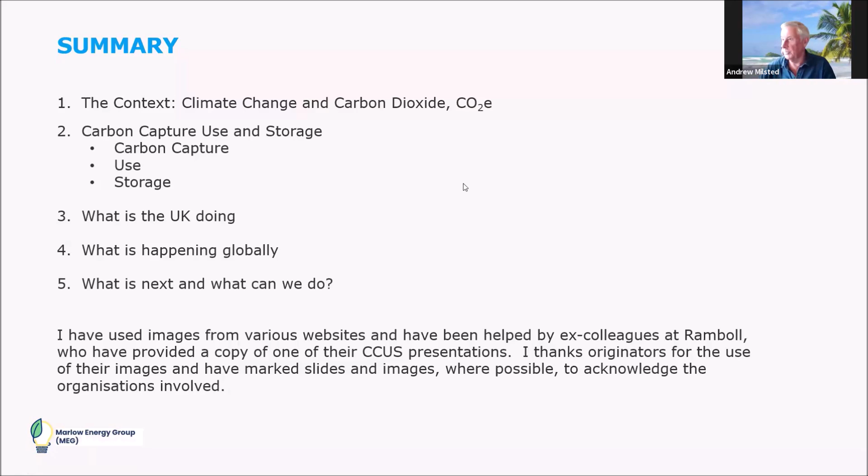First, we'll do a bit about the context. We'll go into carbon capture, and then the use bit of it and the storage bit of it. And then we'll have a quick look at where the UK has got to in terms of doing this, and then a little bit of a look at what we think is happening globally. And then finish up with what has to come next, and is there something that we can do to help the situation? So let's move on.

Climate change: I think most of the people on this call probably understand climate change. We call it CO2 trapped in the atmosphere, causing temperature rise. It's also referred to as greenhouse gases, which is a mixture of gases usually represented as CO2 equivalent. It's called the greenhouse effect. Global warming is one of the terms used to describe this; I prefer climate change myself. And as we came into the 2020s, the global emissions of carbon dioxide had reached 59 billion tons of CO2 per year and beyond. We'll look at those figures again because, depending where you look on the internet, on various reports, you get slightly different figures defined in slightly different ways.

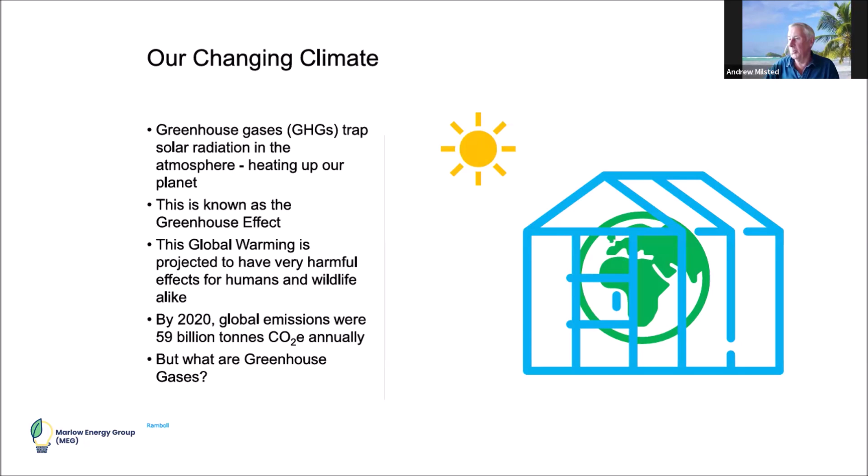In terms of greenhouse gases, a large portion of man-made greenhouse gases are coming in the form of carbon dioxide, as we talked about, usually from burning fossil fuels. But there's also quite a high effect from methane produced by cows, but also by rotting vegetables and various other things. And actually, from oil reserves, there's some leakage of methane from natural gas systems. So there's quite a lot of methane; in terms of tons it's not much, but it has a big effect in terms of carbon dioxide equivalent.

Nitrous oxide is formed whenever you burn any fuel because you're basically using air, which has a lot of nitrogen in it, and therefore it forms nitrous oxides of various kinds. And nitrous oxide, N2O, does have a significant climate change effect, greenhouse gas effect.

And then there are the fluorine gases, the refrigerants. Various forms of refrigerant are out there. We've tried to move on from some which had a major effect on climate change, but some of those are still being emitted. And really small amounts of this kind of material do make a big difference to the load of greenhouse gases in the environment. So that's still a work in progress.

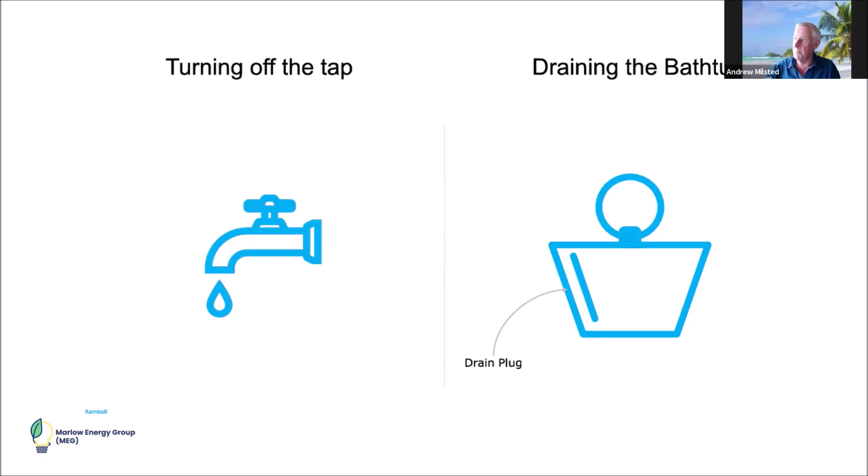Let's just pause a second because I came across some interesting information on the internet, which is the kind of information that some of the climate deniers are using. So I thought it was worth, for our purposes, to understand where their arguments seem to be coming from. Whether we call it misinformation or not, I'm not sure.

But basically, they look at the natural emissions of CO2 from forests, from volcanoes, from natural systems, from the sea. CO2 is going up all the time from rotting vegetation and so on, from animals, from us breathing. So there's about 10 times. It's in the order of 450 billion tons of CO2 a year. Now, balance that against something in the order of 50 billion tons of man-made CO2. And their argument seems to be, why worry about the anthropogenic, man-made CO2, because it's dwarfed by the natural emissions.

But what is happening naturally, particularly over the last 10,000 years and periods of stable climate, is that the natural emissions are roughly balanced by the absorption of CO2 by the natural environment, by growing trees, by seas, and so on. So there is a balance in place.

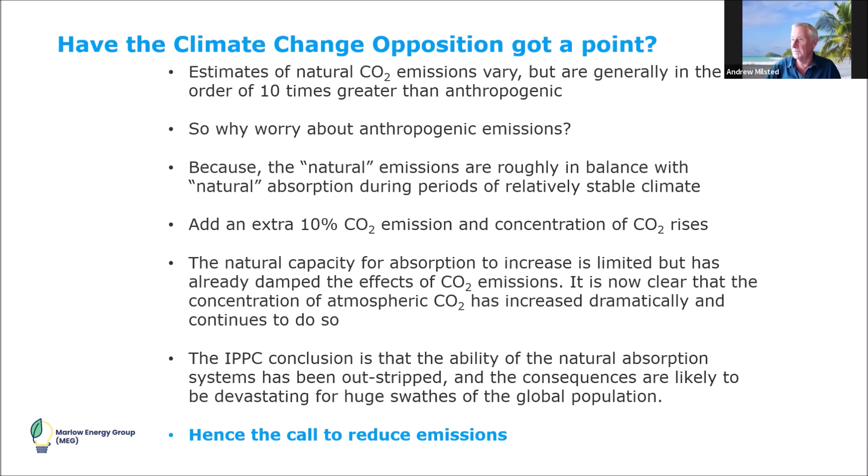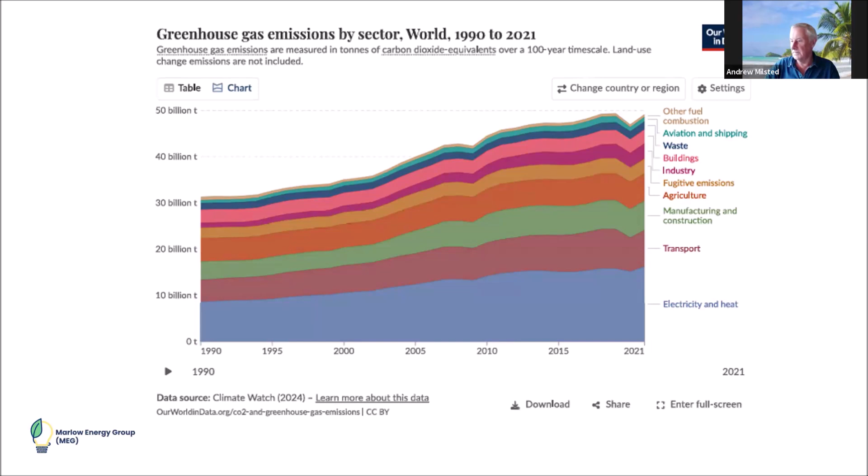So that takes us up. There was a dip you can see around the time of COVID across the world. So everything sort of turned down a little bit. We can see that dip in the data, but it's gone up to 50 billion and over since then. So that's from Climate Watch, figures released in 2024.

What happens with projected greenhouse gas emissions in terms of future warming? Well, with current policies, which have been announced globally after the various COP meetings, we're probably on course to continue to increase temperature to 2.5 to 2.9 degrees C. There's a broad range there because it's not clear exactly how effective some of those policies will be.

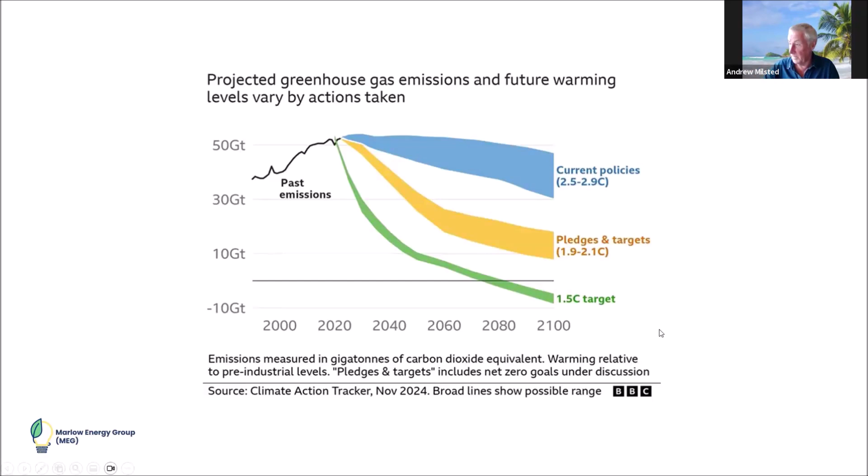Carbon capture, this is the second part then, to talk about carbon capture, use or storage, depends how you want to say it. It's a means of preventing or removing CO2 from man-made emissions and storing it away so that it doesn't re-enter the atmosphere.

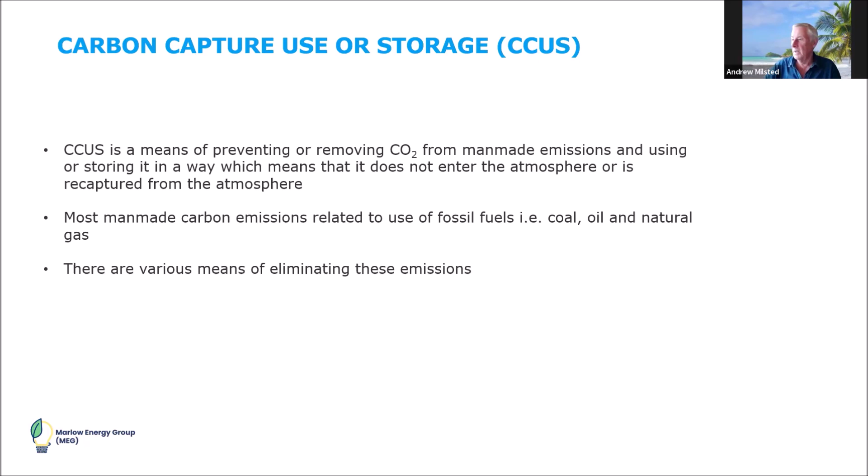Most of these man-made emissions are generated by the use and burning of fossil fuels, coal, oil, and natural gas, but there are other emissions related to chemicals manufacture and so on, cement manufacture. Cement is one of the big contributors, in fact. And when we look at this, there are various means of trying to eliminate or prevent those emissions.

The key drivers we see, in terms of the actual carbon capture mechanisms, relate to the capture rates, the availability, how reliable the equipment is in operation, whether it's technically or commercially proven, its health and safety. But all of these things really depend on some financial benefit being in place for people to build these plants. They cost money to build, they cost money to run. So unless there's some financial benefit in doing so, they will not get built and will not be operated.

Carbon capture processes, there are a lot of them. We'll look at that, but I'm not going to look at all of them in detail, but they tend to be defined in four basic categories: post-combustion, pre-combustion, oxy-fuel, and industrial processes. So all of these things produce more or less carbon dioxide. But by far the biggest emission of CO2 is post-combustion, and by far the biggest application of carbon capture is in the post-combustion process.

I have to say, when I'm talking about this, industrial processes, depending on how you look at that, there are many industrial processes which have been in operation for some time, which separate carbon dioxide from other materials. Most notably, let's take the example of natural gas. Natural gas quite often comes out of the ground with a high proportion of carbon dioxide in it.

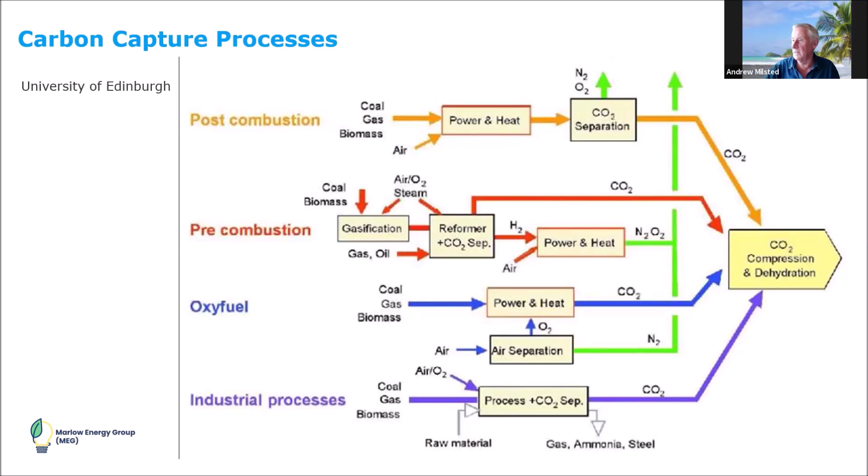So, as I said, there are any number of processes which have been looked at, researched in universities. There are many chemical ways of taking carbon dioxide out of a gas in a gaseous state. There are some biological processes, enzymatic processes, which could become significant in the future, but haven't yet got to the stage of development where they are being commercially applied. A lot of this comes down to the cost of running these processes.

There are plastic membrane processes and cryogenic processes which do separate carbon dioxide, and membrane processes are used for conditioning natural gas, as I was describing before. You can put them through a membrane process which lets the methane pass and keeps the CO2 out, and it gets vented. Chilled ammonia, they've been playing around with that for a long time without it really getting much traction.

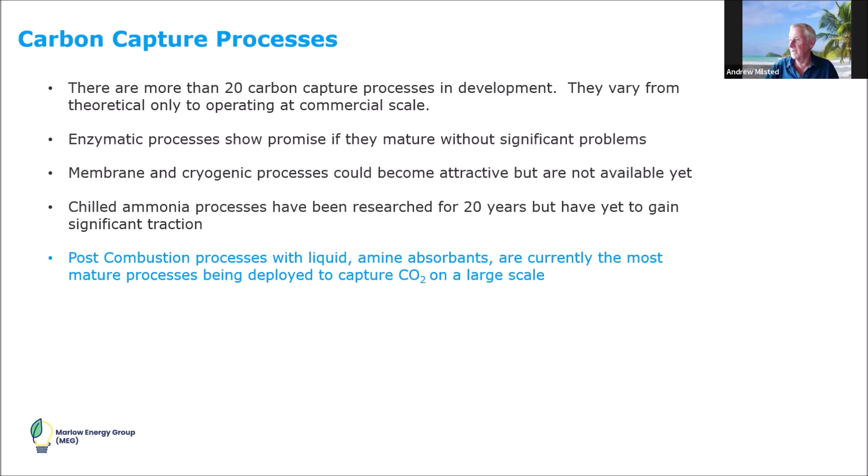So we're going to look at post-combustion, and in post-combustion, the majority of processes we see at the moment are using a chemical called amine, which absorbs CO2 at room temperature. If you heat it up to 50, 100 degrees, something like that, it will then let that CO2 go. So you can use that reversible reaction to take CO2 out of flue gas from an engine or a power station and direct the CO2 to some storage.

So let's just have a look at that. I don't expect you all to suddenly become clever engineers, but it basically consists of two large columns with various pumps and heaters around them. You can see on the bottom left of that column there's a flue gas inlet, so you can pump flue gas through a column of amine trickling down. The liquid at the end is amine with CO2 in it.

Clean flue gas, the rest of the flue gas, the nitrogen oxides and so on, will pass out of the top of the column and go back into the air. The amine with the CO2 in it goes into what they call a stripper column, where it's heated, and that drives off the carbon dioxide, which can then be compressed and liquefied to be used elsewhere or to go to storage. So this process doesn't determine whether it's used or stored, but it does require some heat to be applied.

And actually, there's a fair amount of steam energy that has to go into this process to make it work. Electricity to run the pumps and the compressors at the end. So there's a fair amount of energy as well as cost of the equipment that has to go into this to make it happen. There are health and safety challenges with this system. Amine is something you don't want to wash in, it needs to be handled carefully. It is the most mature carbon capture technology, but it does require these inputs of energy to make it work.

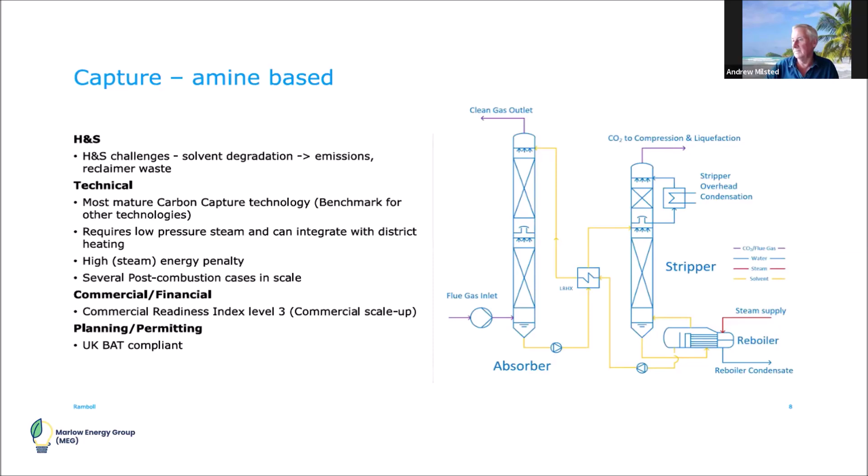There are several post-combustion cases operating at scale, and as I said earlier, it's a process which has been used in industry for separating carbon dioxide for a long time now. And commercially, everybody knows basically how much it costs to build and run, and so there's some confidence in building this thing and it doing its job. It's also best available technology compliant. That's a term in UK and European legislation that means that it's accepted as being reasonable practice.

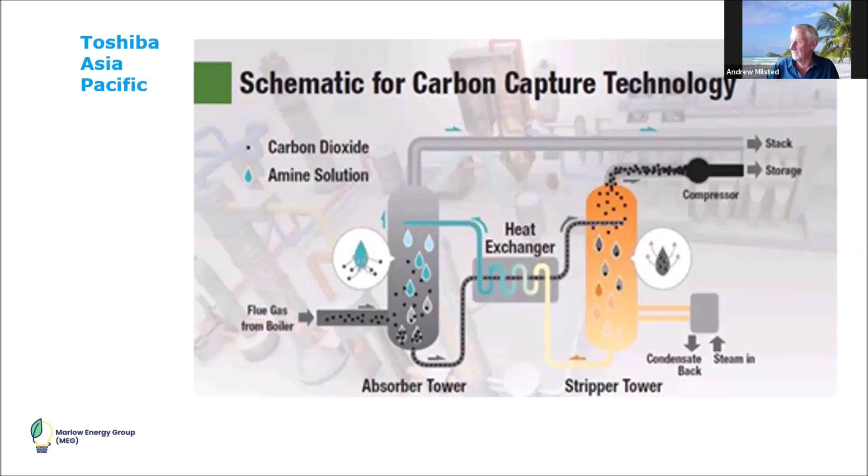That's just a slightly more colourful chart of the same thing, but maybe it helps some people to understand that the little molecules of CO2 get into the amine, and then when it's heated up, they are driven off in a concentrated stream to storage. This one, care of Toshiba, Asia Pacific. Toshiba were also the people who built that demonstration plant we saw on the introductory slide.

Some of the downsides, let's just briefly touch on that. It's a tailored process. Most of the amine solutions are chemically enhanced, let's say. They have additives which improve their performance in various ways and stop them being contaminated by minor constituents of flue gas. They tend to be pretty expensive, so you want to keep hold of those as much as possible. They can capture high percentages of the carbon dioxide in the flue gas. Some claim up to 99.5%, I think I've seen. But a safe level is in the 95% region you can get.

They're usually proprietary. Every process design company worth its salt seems to have its own amine process. They design the facility itself, they give the guarantees, and they will supply the actual amine. So Toshiba, Shell, various others have processes which can be used by designers to make this happen.

The flue gas itself, depending where it comes from, could be very clean, but if, for instance, at worst case, you're putting it on the back of a coal-fired power station, you may have to make sure that you've removed the dust, sulfides, which are formed from coal, usually chlorides maybe as well. All those things will contaminate and cause problems in the amine process. So you have to put in filters, if you like, to remove those prior to the carbon dioxide absorption process.

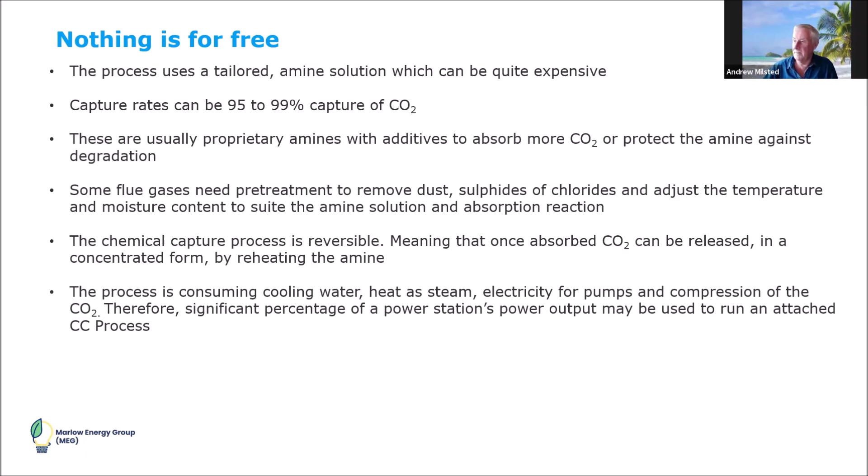So it's consuming heat, it's consuming cooling water, there's electricity. We mentioned all of these things for compression. It can take quite significant percentages. If you fit it on the back of a power station, you're probably losing something more than 10% of the power that that station can generate, because you're taking energy from the power station to provide the energy and heat that this process requires.

You still do lose amine, and it has to be replaced. So it would be a waste that they have to get rid of, and it does need to be replaced to keep that process running. So there is some turnover of the amine, which is quite expensive.

And to fit it on the back end of an existing power station or other process is not as efficient as designing a new power station, which is integrally designed with the carbon capture for a lot of reasons, which I won't go into, but you can optimize the two processes together to make sure you get the least amount of loss of energy, if you like.

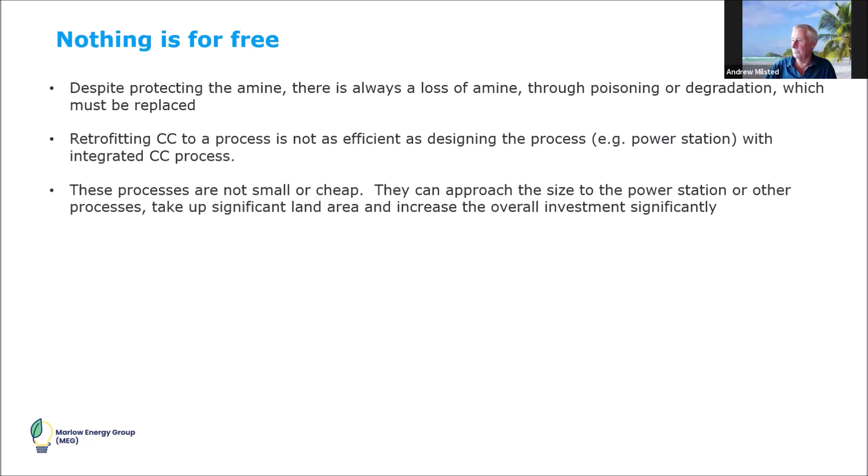And they're not small or cheap. These things do cost significant, tens of millions of pounds to build. They can be quite significant add-on portions to a power station or chemical process. Just to give you an idea of size, this is from How Stuff Works, the website. I found a picture of one of the few full-scale carbon capture processes.

The bit over here is, I believe, the carbon capture process. And if you look at the cars and vehicles around the bottom, it's a big lump of metal. This inset picture has the power station. These are the power station itself with the 4 chimneys. And on the side there is the carbon capture unit. So you can imagine this thing is costing tens of millions of pounds.

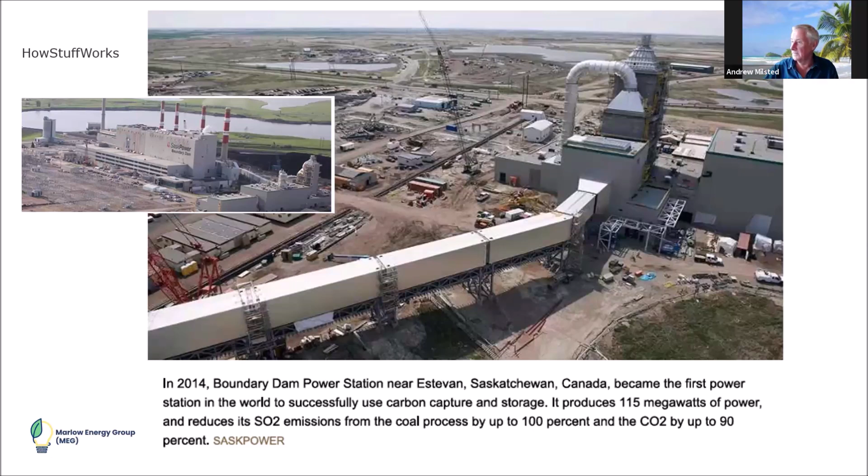This one's actually in Saskatchewan in Canada and has been in operation since 2014, I understand. So it works. It captures up to 90%, and that is then stored underground in Canada. So it is operating at size in some places.

Now we move on to what happens after you've captured the carbon. Now the first step should be to try and reuse it. So it can be used. It can be used to assist in oil field recovery. It's pumped into the oil reserves to help push out the last barrels of oil. So you can make efficient use of the well you've drilled.

CO2 is quite important for crops and plants. Talking to growers up in north of London a few years ago, they were using CO2 to help grow their salad, peppers and tomatoes in glass houses up there. Cucumbers, they were adding 10% to the productivity of the glass house by putting several hundred ppm of CO2 into the glass house. So it does work.

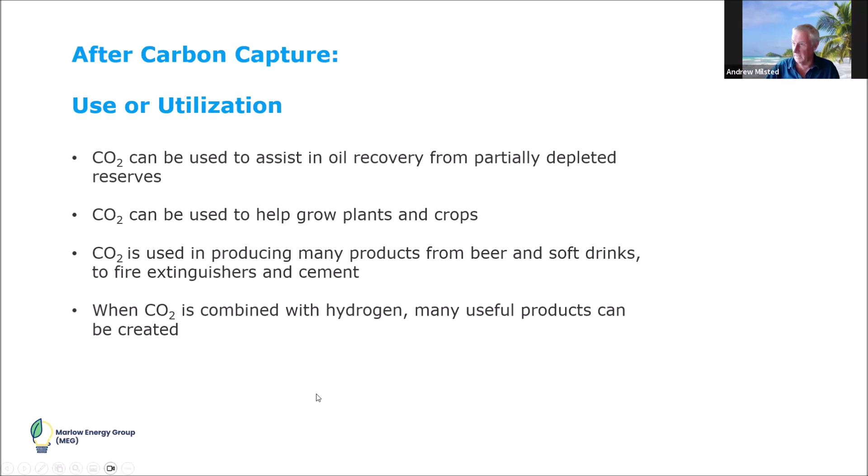It's used in many products, as you all know, from beer to soft drinks, fire extinguishers, and also cement. Cement's potentially a big user of CO2. But what's being pushed by a lot of the petrochemical companies these days is using the CO2 to actually combine with hydrogen in order to make useful products. So I think the next slide basically is a picture of that.

So the idea being that you capture the carbon dioxide at source, you condition it, you use some renewable energy, which can come from panels, wind power, whatever, and that gives you some hydrogen. You could split water to get hydrogen, and by using the hydrogen with the carbon dioxide, you can then make a wide range of products with different catalysts, different processes.

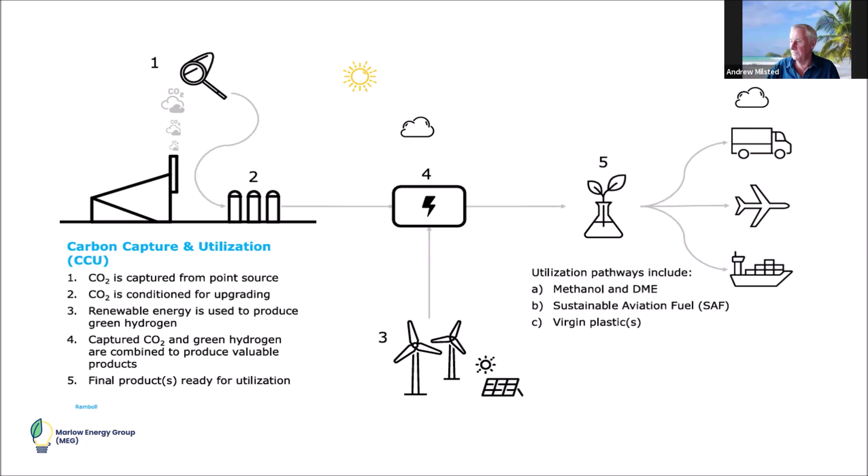You can make things like methanol, dimethyl ether, industrial chemicals, if you like. You can make aviation fuel. You can make plastics. There are a wide range of products that can be made. How much it costs to make those is not quite as obvious in the marketing blurb at the moment. And that would be the determining factor on whether it's used for those kind of processes.

So if you can't use the CO2, then it'll go to storage. And basically, storage is at the moment seen as placing it in the ground in geological structures underground, quite a long way down. And at the moment, I'm jumping ahead a bit, but in the UK, we're looking at using some of the used oil and gas reserves in the North Sea to introduce the CO2.

One of the important things I want to point out in the slide is the ship in the middle. You can do the carbon capture. That's proven and good. There's been a lot of research into pushing gases and things down into geological structures. That isn't such a big problem. I don't want to belittle it, but without some means of transport, of getting that compressed CO2 to the well, this whole system isn't going to work. We're not going to take CO2 out of the air.

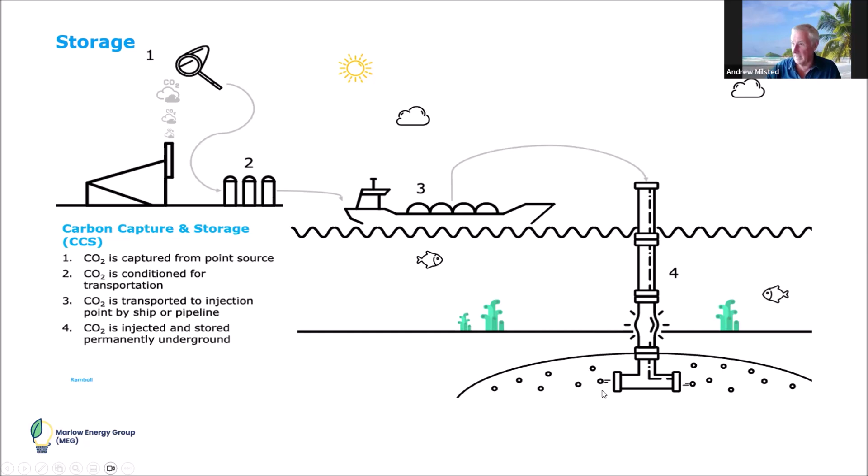So storage, as I said, it can be used. Depleted oil and gas fields can be used. There's a lot of talk about using saline aquifers, preferentially, I think, confined aquifers. It can be dissolved in unconfined saline aquifers, but I think the first choice is likely to be, in the UK, depleted fields or confined saline aquifers.

It's worth saying that you would need a geologist to explain to you the details of this. I'm not a geologist, but my understanding is that if you put it in the right field, the carbon dioxide will actually mineralize, will react with the rock and solidify as carbonates, which will lock it away for millions of years.

I don't think it's intended that the gas would stay as a gas in those deposits. But having said that, natural gas has been locked away for millions of years before the oil industry came and drilled holes into those structures to release it. So, even if it was a gas, as long as it's put in the right way, in the right place, it should stay there for geological periods of time.

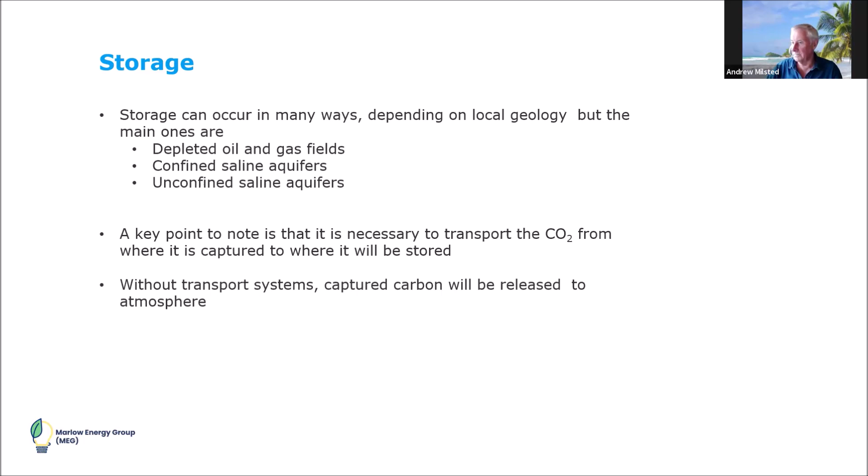I made the point about transport of CO2. That's not a given. That still needs to happen, and it will cost quite a lot of money to set that up and to keep it running. And without that transport system, we won't finally remove this carbon from its emission sources. So there are challenges in carbon capture, a lot of immature technologies. It costs money to build and operate.

At the moment, the regulatory framework across the world is forming rather than mature. Inexistent, that's a Danglish word meaning non-existent. So at the moment, there aren't transport systems available for the CO2, so that needs to be developed.

And the other major criticism of it is that it allows the fossil fuel industry to soldier on whilst trying to pretend that it's clearing up some of the problems related to it. So there's a political issue here. So what's happening in the UK? What are we doing here?

You'll be pleased to know that as of 2013, the UK implemented European directives which require any combustion plant over 300 megawatts of electrical generating capacity to undertake a study to determine how it would fit a carbon capture unit on the back end if that became necessary. So it's supposed to look at reserving a plot of land next to the power station that's big enough to put it on, and also to nominally look at how that gas would be transported to a final place of storage. I have to say that the transport element of that is very basic.

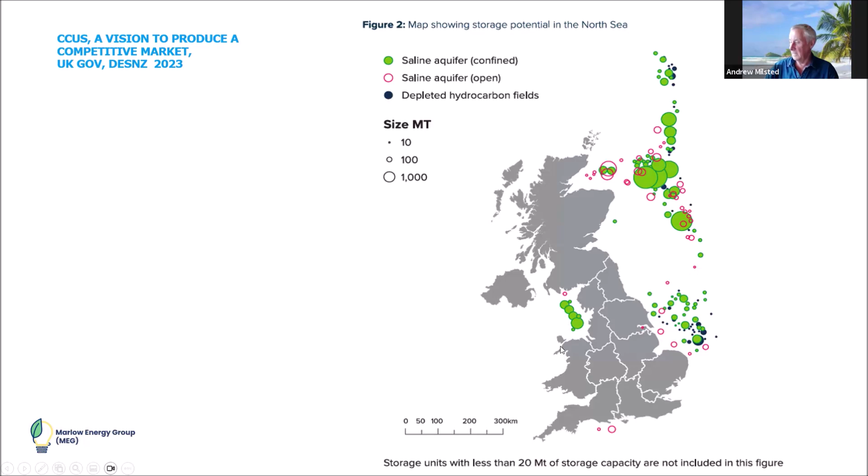And the size of the dot or circle gives you an idea of metric tons of CO2 that can be absorbed. I think it's worth noting there's a lot off the east coast here. There's a lot, as you'd expect, off of Aberdeen in the North Sea, but there's also some in the Irish Sea off of Liverpool and the Northwest. So moving on.

And what they did in defining this vision was to set out a number of industrial clusters, these stars, which would be defined, and some attempt made to get these up and going in terms of businesses, in terms of different locations in Middlesbrough, Teesside, the East Coast cluster. These two kind of go together because they're feeding into the same fields. The Northwest, there's the HyNet cluster in the Merseyside region, and then around Aberdeen, another cluster up there.

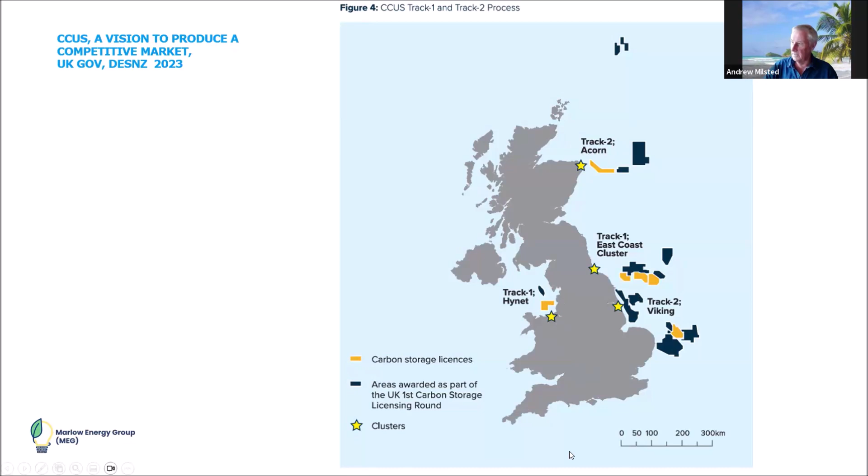You'll notice that big areas of the UK are not included. London, the Midlands, other industrial areas are not so far included because they're seen as being too far at the moment from these clusters until these clusters have started work, as it were.

Here's again a vision of what would happen at Teesside in the East Coast cluster. And I put this up just to indicate that there are a number of different companies and potential developments in terms of hydrogen production, hydrocarbon, hydrogen production by Kellas and BOC, the energy from waste plants, there's power station, nitrogen fertilizer plants, there's the net zero power, which is a power station with carbon capture. Obviously, some of these are further advanced than others, blue hydrogen, BP.

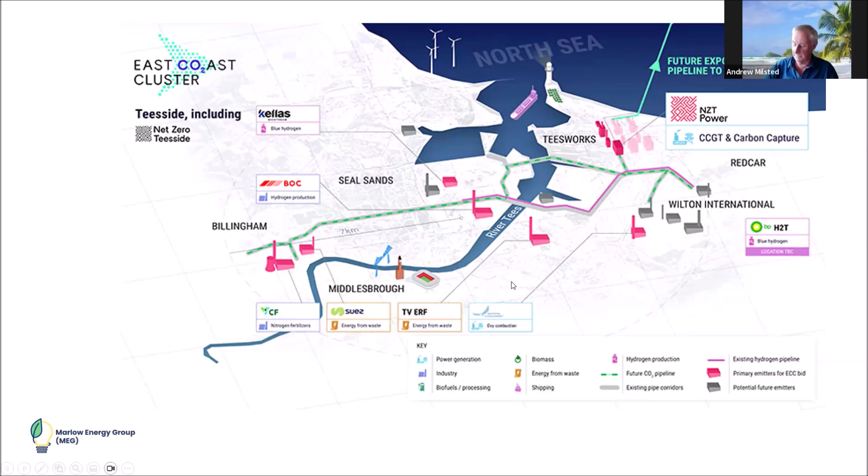So this whole area was very industrialized and has been for 50 to 100 years. So many of these facilities are being built on land which has been chemical process land for many years. Seal Sands is a big petrochemical area in Middlesbrough. But the benefit of this system is that these things are relatively close together, and therefore interconnecting pipe work and transport of materials is relatively low cost.

That was Middlesbrough, Grimsby, Hull, Teesside area, sorry, Tyneside area is also linked into the same Endurance fields in terms of storage. So UK government, wherever they got to with this, they passed the Energy Act in 23, which gave them powers to start setting up companies and writing contracts for these various actors in that process, and to try and allow them to do whatever actions they need to do to get some of that transport infrastructure in place.

And this government, the Labour government, at the end of last year, announced, Ed Miliband, I think, got the pleasure of announcing 21 billion in funding for the first CCUS projects, which would basically be the East Coast cluster, which we just looked at, and the net zero Teesside cluster, and then HyNet in the northwest of the country. So those things, they are trying to get off the ground and moving with the help of various industrial entities.

Let's just have a quick look at global issues before we finish, so try not to keep you too long. I thought you'd be interested to see what's happening globally. There is an outfit out there called the Global CCS Institute. Its job is to promote and help different countries to adopt carbon capture and make the technology available to them. So obviously it has a particular viewpoint in terms of promoting the technology.

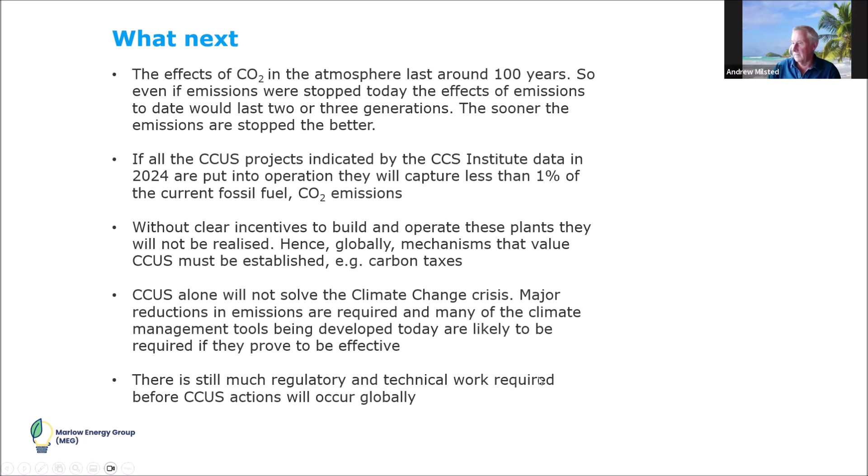And I guess my view is we probably need access to it as part of the toolkit for managing the climate crisis. But there are many other things, particularly reduction in emissions, which has to happen to make it work. And I think there's a long way to go in terms of the regulatory, legal, and technical work that needs to be done before it's all going to be happening at scale globally.

And just to bring us back to ourselves for a minute before we leave, what can we do? I don't want everybody to despair. We can do what we're trying to do in MEG already, which is help people understand what they can do themselves in their house, insulation, travel, diet, to make choices which reduce their carbon emissions.

But I think importantly, we can talk to friends, other people around Marlow, neighbours, and maybe challenge them a little bit if they don't believe that this is happening and it's a problem. We can help by using social media to spread the word. I think there's some theory that if 10% or more of the people form an opinion in one way, then that's possibly enough to tip the balance. We need to get a number of people believing in this and feeling it's important.

I believe most people talk to their neighbours and family before they form opinions on what they're going to do about anything, voting or reducing their carbon footprint. But we need to make sure that that's working in favour of some action on this.

So we can also lobby politicians and keep the pressure on, not just the Green Party, who maybe are there already, but also perhaps lobbying parties which are speaking out against climate change and net zero at the moment, to try and persuade their politicians that they're not going to get voted in unless they come up with a sensible policy.